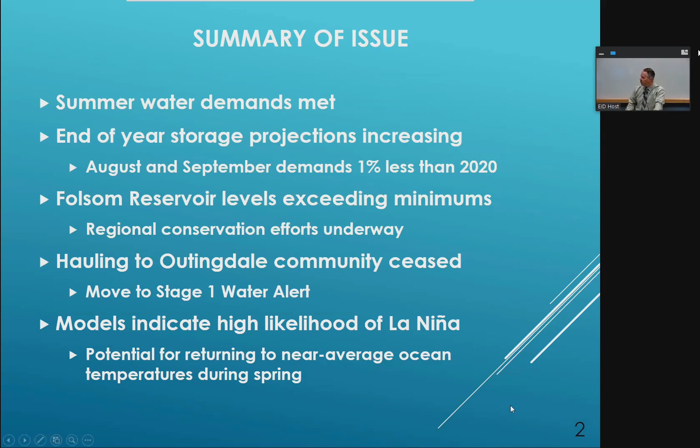Next slide, please. Okay, these were the numbers, which are obviously changing by the hour, so I'm not going to focus too much on those, but just to kind of show relative percentage of where we're at in our reservoirs here.

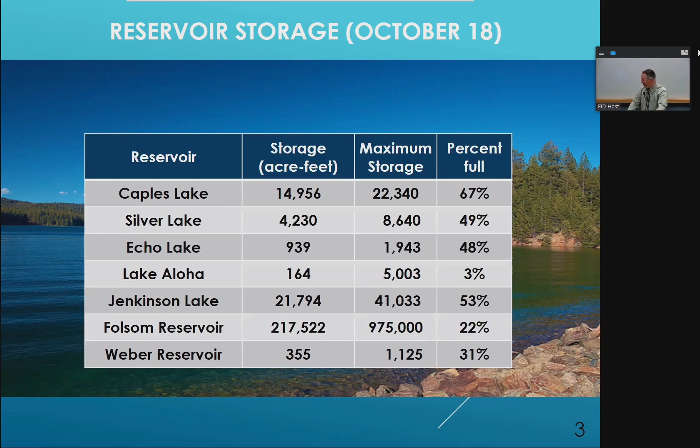That's why we put a date on it. Didn't anticipate such a change, but these were as of last Monday to make the board packet. I typically like to update those, but obviously I didn't get a chance this weekend.

We have been able to gain a little bit more storage, so now our projection, we're thinking we're going to be about 800 acre feet higher under our most conservative projection - so maybe 16.6 by end of December. Obviously, we just gained another 800 feet last night, so that number will change again. The good news is that red line, the slope should hopefully at least flatten out and hopefully start to increase. But for the most conservative planning efforts, we're still assuming the driest of conditions.

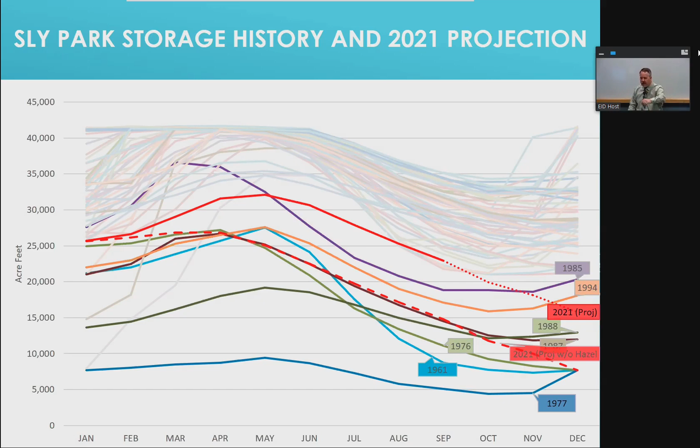Next slide, please. As I said, our demands have really stabilized, and we're down overall, which is good. Considering August and September are very high demand months, those are really good months to be down.

We shouldn't set aside what we did to support the effort to protect our community in the Caldor fire. We had 2 mobile retardant bases, hundreds of fire trucks connecting to our hydrants. When our canal was online, we gave them drafting points on a map to help protect our communities. You can't really measure that directly, because obviously we don't assign them a water meter for their efforts.

But what we do know is that even though 10% of our customers were moved out of that region, our Pollock Pines area, our demand actually was the same or a little bit higher than before they left. So it kind of shows you the amount of water that we used to support the community.

This was as of last Monday - we were trending even better, maybe 3-4%. Obviously with the rain, hopefully everybody's turned off their sprinklers for a long time, and we'll see even greater conservation by the end of the month. Next slide, please.

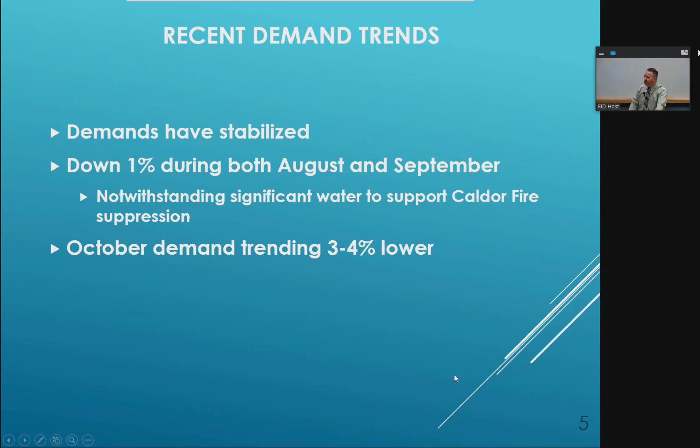I do want to just take a minute - I know several board members have raised this in the past, I think it's mostly just for the benefit of the public - but just to take perspective of our conservation. Our customers have been doing conservation for many years. I know we talk about asking 15% from last year, but we've been saving for quite a while. We went back to look at some of the records to kind of give a perspective of what that means.

So the first thing we need to look at is, El Dorado Hills, the western end of the county, is one of the fastest growing areas of the region. So our total district demand naturally is going to increase. So really, to look at consumption, you want to look on a per connection or a per capita basis, and so that's what we did.

We looked at this last dry year, 2013 versus 2020, individual homes, single-family residential connections. You see in some of our higher-using areas, those developments that had more irrigated areas, a 31% decrease in upper El Dorado Hills - that's zone 1, kind of Silva Valley Road to Bass Lake, that area where you have more outdoor water usage.

District-wide, it's everywhere from the county line all the way up to Pollock Pines, a 10% decrease even before we asked for any conservation. So it's important to look at that perspective. District-wide, our customers are using 10% less than they did 7 years ago under similar hydrologic conditions between 2013 and 2020. We looked at 2019 too, and those numbers were north of 30%, maybe 28 and 34% for some areas. That conservation has been happening for quite some time.

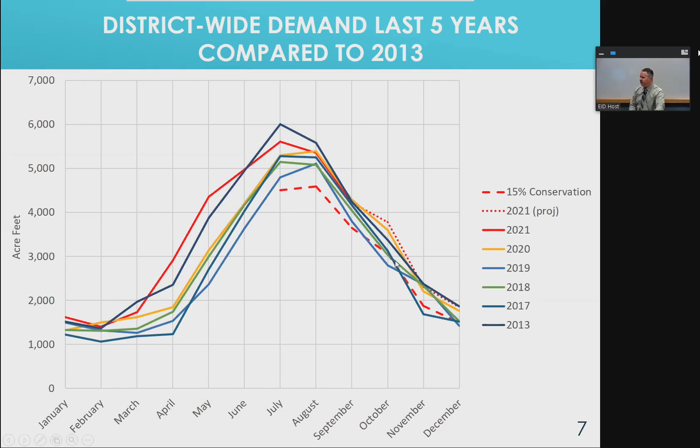This is a graphical illustration for our customers that may be listening. 2021 is that red line there, and the dark blue line was 2013. You can see we really turned that corner much sharper than we did in 2013 when we initially got into that drought situation, the previous drought situation. For our most conservative planning, we are still planning that dotted line in our projections. We're hoping that this current conservation trend will continue. Obviously, in October it will, and hopefully we get a little rain in November, December. But that is where, just for planning, where we expect to be. That dash line is just that 15% conservation from 2020. Next slide, please.

These are the weekly updates that Brian's staff send to the state. Since our drought declaration at the end of July, we are completely even as of mid-October. Obviously that number will only go down in this case, so less usage than 2020 as the year ticks on. Next, please. And about the same for recycled water, just a hair little bit better.

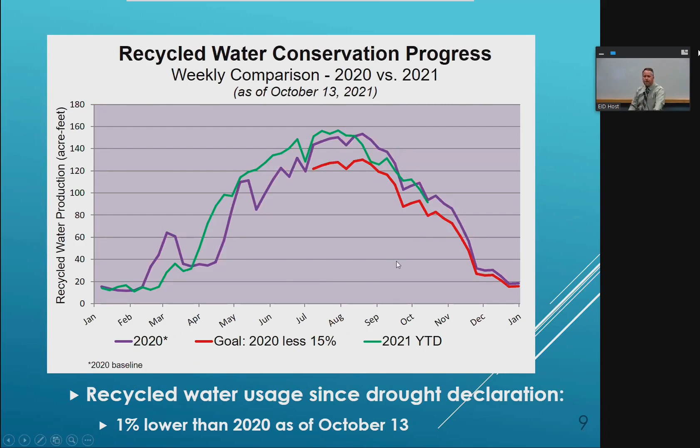I always like to show this. This is a graphic provided by Regional Water Authority, and this is kind of the greater Sacramento County region, or say the greater Sacramento region, inclusive of El Dorado County. You can see there, overall, they represent theirs in millions of gallons, but just the general trend is we're kind of following what our neighbors are doing, which is good.

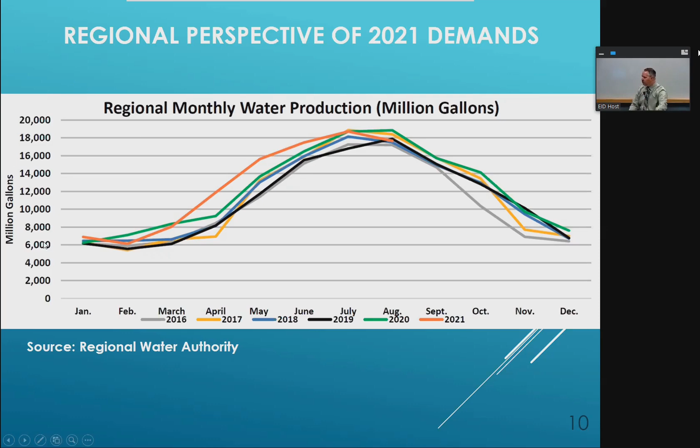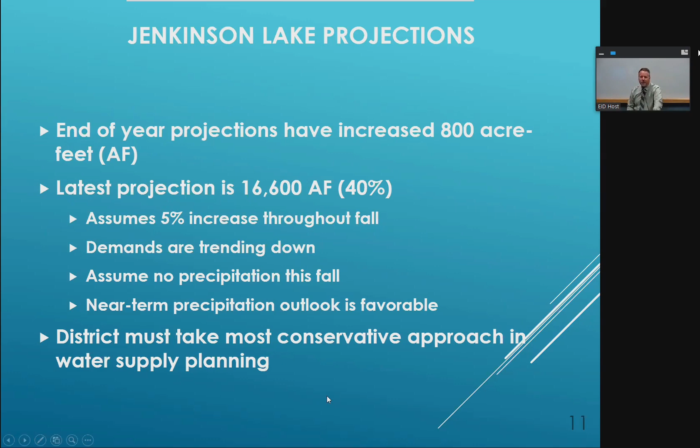Next slide. This slide will now be a little bit dated, but we did save about 800 acre feet over what we were thinking we might use in August, September. So that goes into our savings account. Our latest projection was about 16.6. As I said, that did still assume a 5% greater demand just for planning purposes. Demands are trending down, and at that point we had no precipitation. We can scratch that clearly off this list here. But we continue to take the most conservative approach.

I swear I put this slide presentation together before this weekend. So our supplies are focused on debris mitigation. Clearly, the photo I got this morning showing all the logs at the Camp Creek diversion is testament to the exact issue right now.

Dan, do we have, we approved the purchase of an excavator to station there at Camp Creek and clear the tunnel as the debris flows down. What's the status of that excavator? So I'll give you the status of the excavator and the status of work, both.

We all read the newspaper about the strike at John Deere. Fortunately, that did not affect the plant where our excavator is being manufactured in North Carolina - the other place we were all gonna take a road trip to up north. So that's still on schedule for mid-December.

Starting early last week, all through the week, we had in total, probably on most days, almost 18 to 20 people there between CAL FIRE and our staff, clearing all the trees down to the road, improving that road, knowing that this situation might happen this weekend. We could put about 50 tons of rock on that road and got it all ready to go down there. Those that have been able to take a tour down there know how steep that road is, even on a good day. So we've got that done.

We're in the process of relocating our gauge house, which will allow the excavator to be staged. Hopefully that's gonna happen later this week if the road can dry out enough. We do have a rental there now that we were doing work with, and to the extent that we can get to that, otherwise it's gonna have to be manual when it's safe, which is maybe a little while. That's where we went. Thank you.

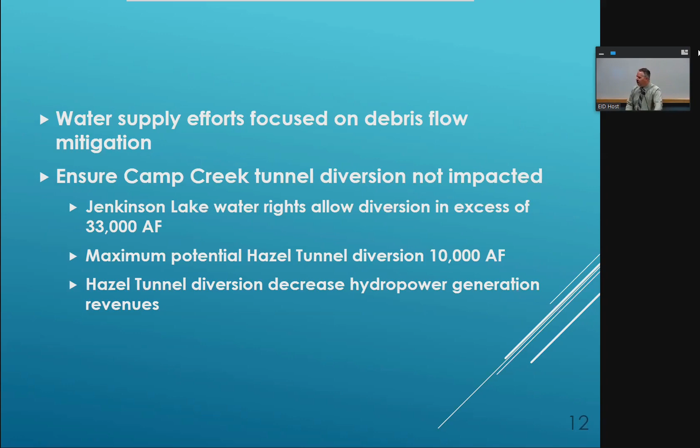So for perspective, most of that water that we'll hopefully fill the lake with will come through the Camp Creek Tunnel, and that's why we're doing everything we can to keep that tunnel clear. And then obviously there's the indirect effect that any water we take to Hazel Tunnel will mean less hydroelectric generation. So whenever we could take Camp Creek water, we do want to take that water.

Next slide, please. Okay, I'll try to move through these last couple of charts as quickly as I can here.

End of September, the absolute minimum that the Bureau had was 200,000 acre feet. They were able to beat that by around 30,000, which was trending in the right direction. And we're doing our part. As of writing this agenda item, we had used 0 Central Valley Project water this year. We've used only EID supplies at Folsom Reservoir. So that is a huge win for the district.

I wanted to look at statistics—if we're going to get back to normal, what's normal anymore—but average conditions by January 1, we need about 250,000 acre feet. It's happened: in '77 and '78, when we had that really big storm, they gained 450,000 acre feet in those 90 days. We may be close to 200,000 acre feet by the time all this water comes off the hill, so that may be a huge welcome win. Now, it's not the cleanest water in the world, and we'll have to wait for the lake to settle out a little bit, but that may be one benefit of this very challenging weekend.

Probably premature, but any idea how much snowpack we got above Caples? It's changing right now by the hour, Director Osborne. I don't have an update as of this morning. Well, get up there and find out. They're up there in snowcats right now, making adjustments. Hopefully they'll be able to safely make it back. As you know, unfortunately, if we get a big pack and we have a repeat of '97, where it all comes with a warm storm and it all comes down at once, that created all kinds of other problems. Right, yeah, we don't like to talk about that situation, but we're all completely aware, unfortunately, of that.

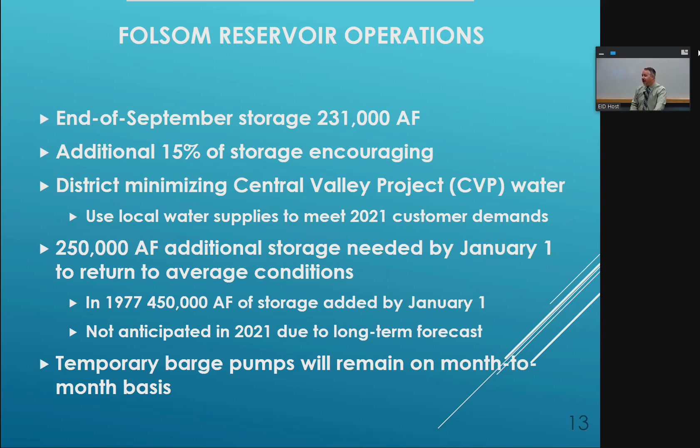And then I just want to reassure the board that we are maintaining those temporary barges at Folsom until we get comfortable that the lake is high enough. It's kind of like your rental equipment these days—you don't want to give something away when you might not be able to get it back later if you need it. Okay, next slide.

We did actually anticipate last Wednesday, Thursday being able to stop hauling. We made the decision not to do that because of what we thought might happen this weekend, and it did happen. We have the staff that manage the Reservoir A water treatment plant, which we call the workhorse, feeding everybody from Pollock Pines all the way down to Silva Valley Parkway basically. That treatment plant does not like high turbidity, and normally you don't get high turbidity, but obviously with the storm, our staff were awake all night operating the plant last night. We just couldn't afford to be diverting over to—no pun intended—moving over to Outingdale to try to get that plant started under similar conditions. Remember, about a third of that watershed was burned out.

So when we release, when we're hauling the full 6 loads, it's about $1,500 a day. It's going to be less than that right now because customers aren't using as much, but from the standpoint of doing everything we can to have safe, reliable water, we made the decision to defer starting up that plant. So all the filters have been qualified.

We've gone through the process, but just didn't hit the button to make regulatory water yet. We'll probably do that hopefully midweek this week. Nevertheless, we're on the edge of that, so we're still requesting as part of the resolution today to go ahead and move to Stage 1. We're there hydrologically, we just want to make sure we can safely be there.

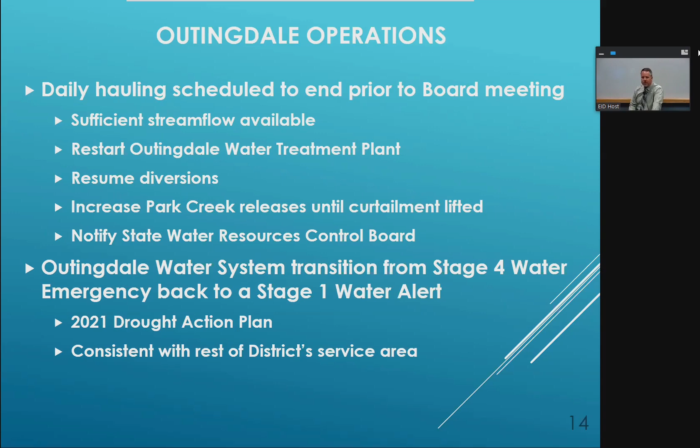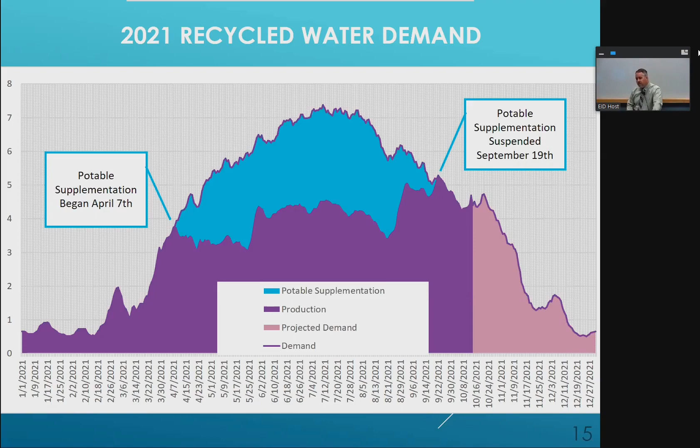Just real quick on Jenkinson Lake, obviously the lake is too low to launch boats on the main boat launch, so we did close that and pulled the mooring facility out, which we normally do. We still have some dedicated fishermen, anglers, and kayakers that still come and use the Stonebraker boat launch. One thing we were able to do is actually help PG&E with some remote area restoration. Since we're not needing our main boat launch, it typically uses a landing pad for emergencies by fire or emergency personnel, but we're able to accommodate them to use that as a staging area and helibase to do some remote area restoration. Unfortunately, it's going to take probably until January in some of the more remote areas.

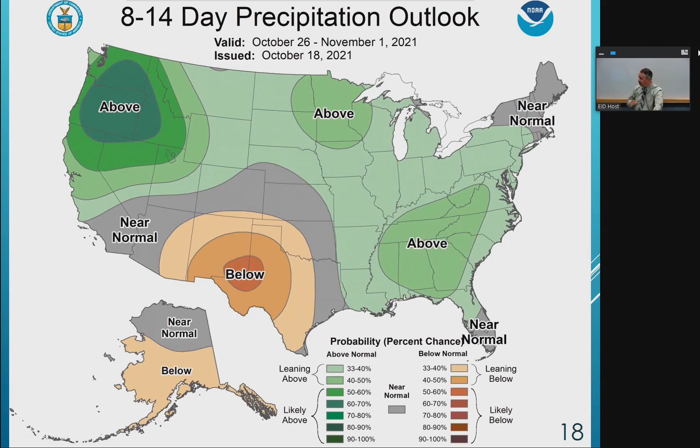Okay, I think this forecast held pretty tightly, so I think we'll just move on. They're still showing, later this week, an increased chance, but I think fortunately we've all seen that after today, hopefully we will experience a period of drying, and we definitely need it for saturation purposes.

I think this is really important, so we do get monthly updates from the CPC, the Climate Prediction Center. We've officially entered La Nina, which was predicted, right? And we're expecting overall below normal precip for the winter and get to more average or neutral type conditions in the spring. I included these two slides, or charts. The one on the bottom left is what I showed you in January, just to give perspective of kind of where we were last year. We're kind of starting out around the same point that we did last year, but we did not go above neutral conditions, which is the 0 degrees from departure of long-term average of ocean conditions. So we're kind of setting up similar to last year, that's probably the best way to describe it.

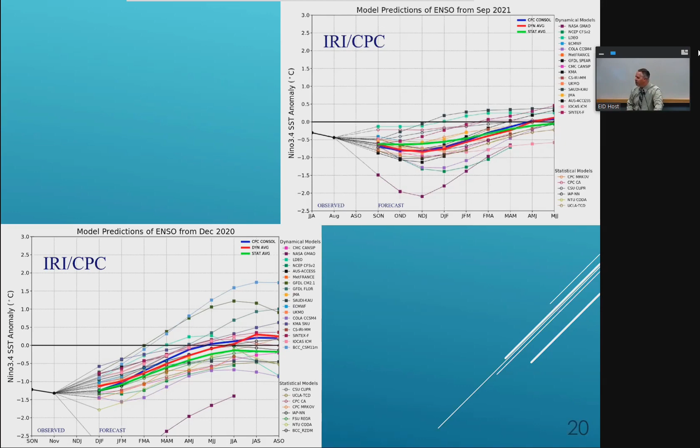Okay, I'd like to just close out the last few slides to talk about public outreach. This last one, we worked on outdoor savings. And we went ahead, every time we have rain, obviously this last one, I think everybody's aware that we need to turn off sprinklers. But even when we had those earlier small rains, just to drop little reminders, hey, don't forget to turn off your sprinklers for the next couple days. And then you probably saw, I saw on the news as well, the Be Water Smart campaign, the drought is back, just to kind of remind people. Unfortunately, the timing didn't quite work out. It's hard to say we're in a drought when we have flooded streets, but hopefully once things dry out, we'll keep moving that forward.

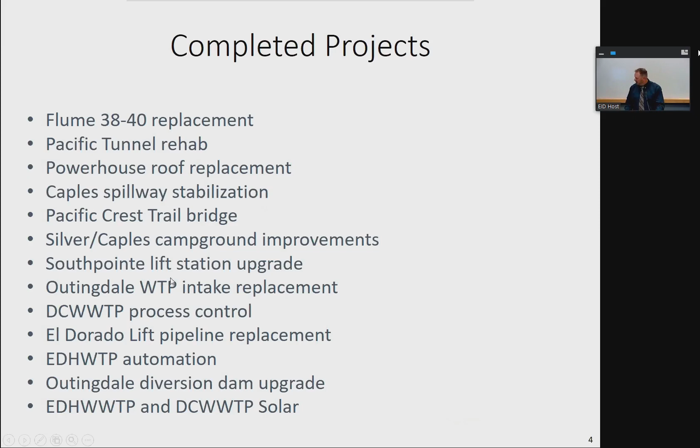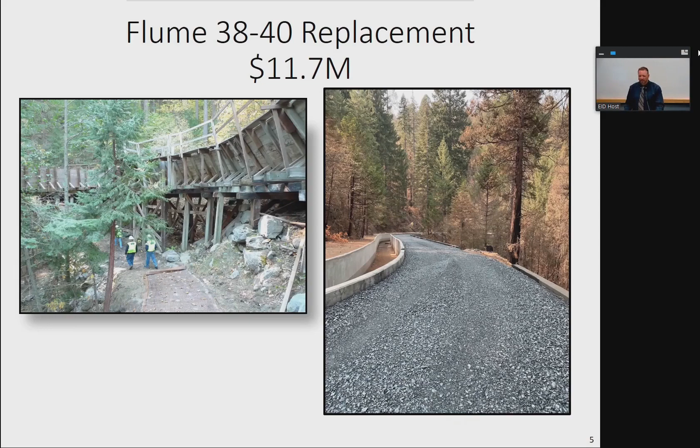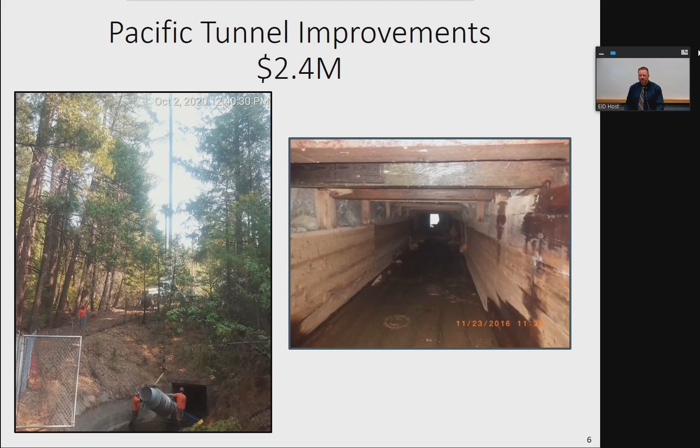We completed Pacific Tunnel improvements to remove a lot of the old wooden timber that was in the tunnel. This is a short section of tunnel along our El Dorado Canal. Next slide -- we replaced the powerhouse roof, about a $780,000 project.

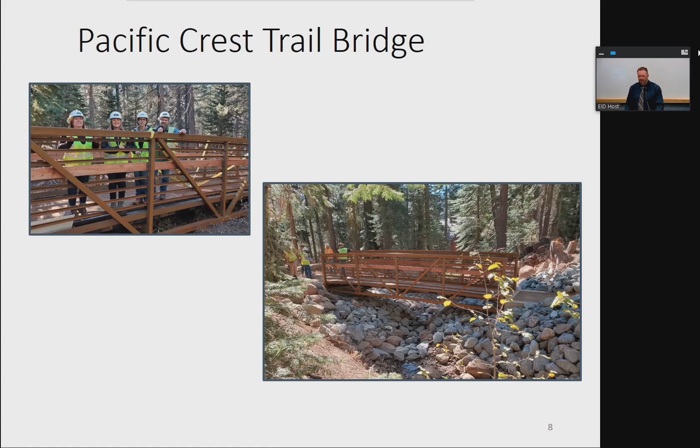A couple of FERC license implementation projects: this was the Pacific Crest Trail Bridge, completed this past year, managed by John Kessler. And then the Caples and Silver Lake East campground improvements, which were completed as well.

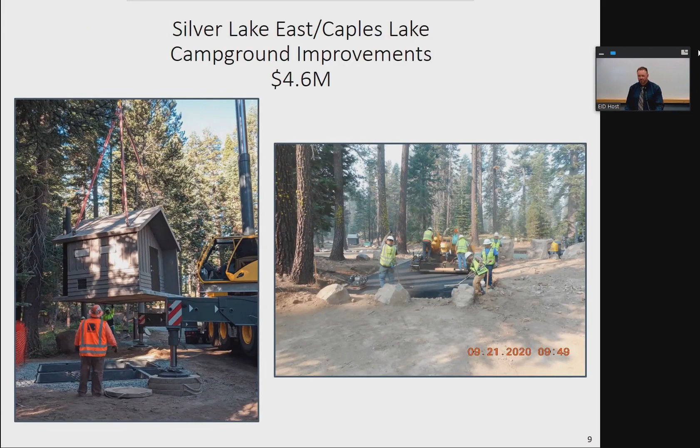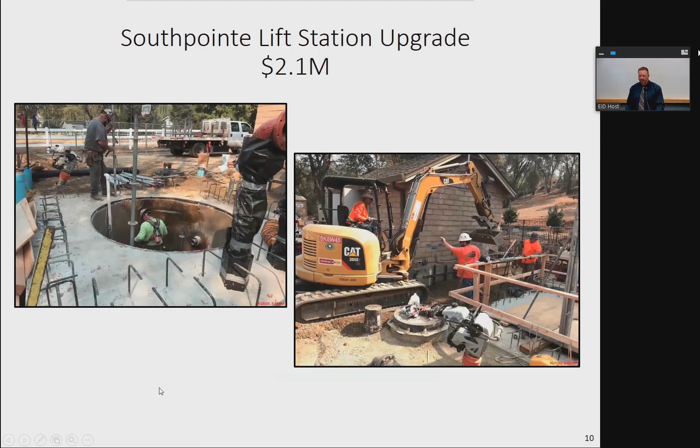On the wastewater side, we have an ongoing lift station upgrade improvement program. We completed the Southpointe lift station, which was in northern El Dorado Hills.

Then moving over on the water side to Outingdale, we essentially completed the intake replacement -- I think we're calling that substantially complete at this point. There was some minor work left to do, but this replaced both the booster pump station and the access. You can see we have a new set of stairs leading down to the river that make it much safer, and a new pump facility at the top.

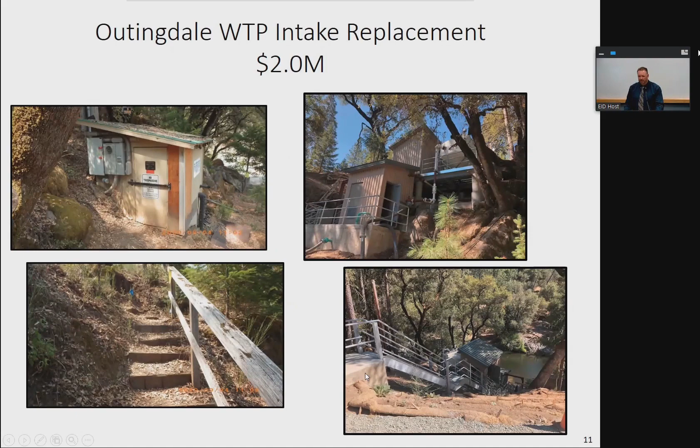We've completed solar expansion at both the El Dorado Hills and Deer Creek wastewater treatment plants, and those are online and running.

We had a large pipeline replacement leading into one of our largest lift stations in the Diamond Springs area, the El Dorado lift. You can see in the picture some pipe that wasn't completely round, and that pipe has been replaced.

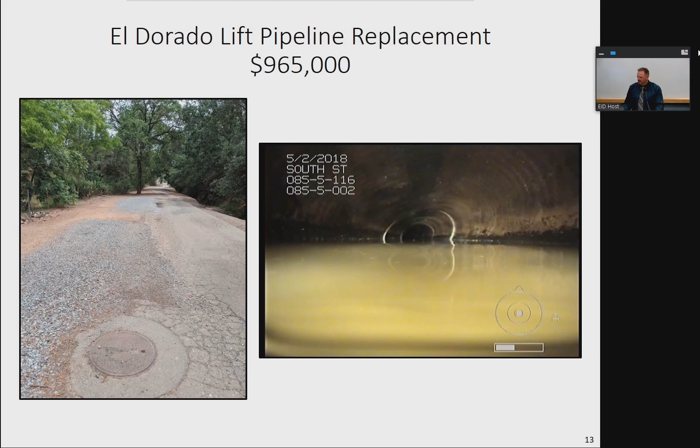Next slide -- some of the projects still under construction include the Folsom Lake intake, Upper Main Ditch pipeline, Flume 30, and Flume 4, 5, and 6. We've also got a partnering project with Caltrans on the Camino Safety Project to relocate two of our pipelines, which is ongoing.

Also, Patrick briefed the board last meeting about the Reservoir 2 roof replacement.

We are also implementing battery storage installations at some of our pump station facilities. These batteries would shave some of the peak power consumption off these facilities. We're working with Tesla on those. And then ongoing water service line replacements.

I have a question for you. Sure, going back to Tesla, how many batteries is that? And is there any future in using those Tesla batteries? What is it replacing, gas-powered generators? No, and I don't know, maybe Elizabeth knows.

We've got both water and wastewater facilities, so I don't know the exact number, but these are installations that essentially remove some of the generator power when we're running off peak.

Go ahead, Elizabeth. Good morning, Board. Elizabeth Dawson, Engineering Manager here at the district. So we have 8 sites where we're installing Tesla batteries: 4 water pump stations, the headquarters facility which hasn't started yet, Res A, Res 1, and El Dorado Lift Station. The batteries at the water pump stations have been installed; the others are yet to be installed and connected.

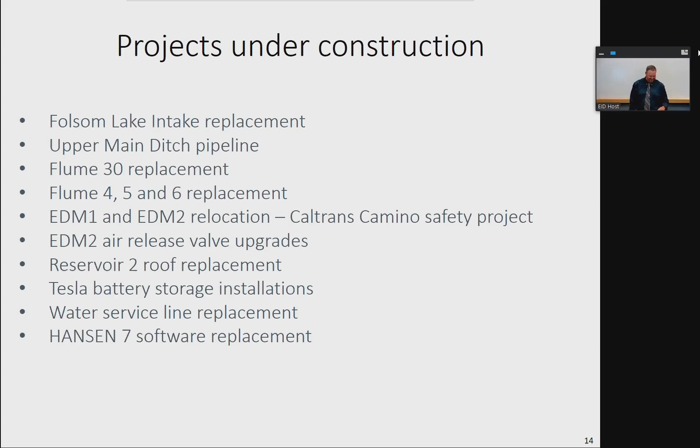Yeah, and generators. Thank you.

Yeah, so just some pictures of where we're at with some of these ongoing projects. This is the Folsom Lake intake replacement. It looks like substantial completion and operational capability should be ready early 2022 for the Folsom Lake intake.

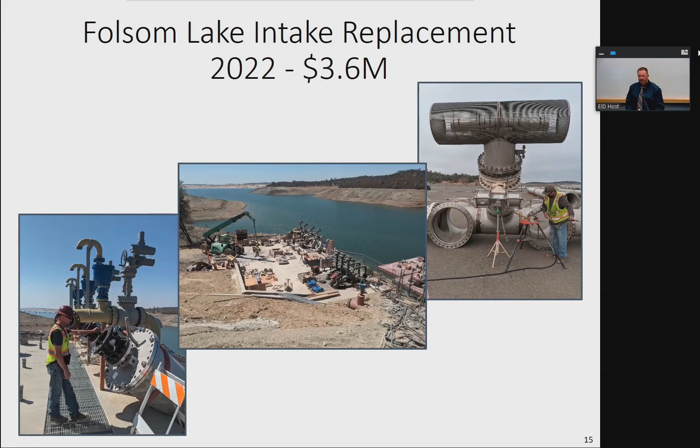The next slide would be Upper Main Ditch. That project is going really well, and it looks like substantial completion and water conveyance through our new pipeline should happen early 2022.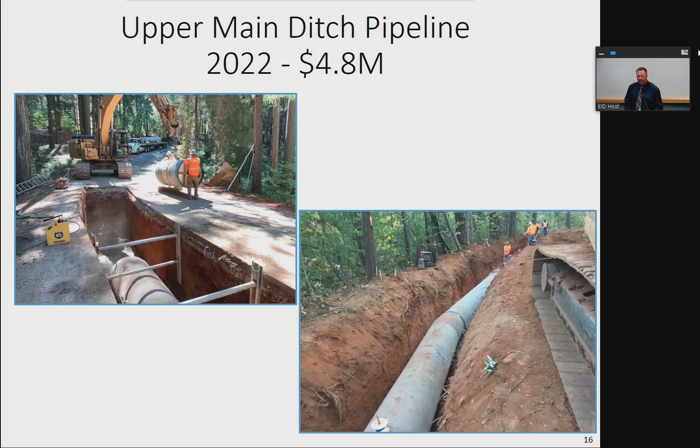I'd like to highlight, if you think about the timing, it was a difficult project to get approved, but think about it in a drought. We no longer have whether it's 1,800 acre feet or 1,500 acre feet going to seepage and loss. Now that water will be 100% delivered to the treatment plant, really saving us for a drought supply.

This slide shows some of our other ongoing projects, not so much construction, but more in the design realm or nearing construction. We've got condition assessments at our primary water treatment plants, the permit 21112 change petition ongoing, hoping to get an EIR out for that project next year, ongoing flume designs, and we are out to bid with our wastewater collection facility relocation. We'll be coming back to the board, I believe, in December with the results of that construction bid, and hope to have that under construction next year.

Also improvements to our penstock, some of our wastewater improvements like the WAS DAFT, echo conduit design, as well as our ongoing replacement or upgrade of pressure reducing stations, water line replacements, and lift station upgrades.

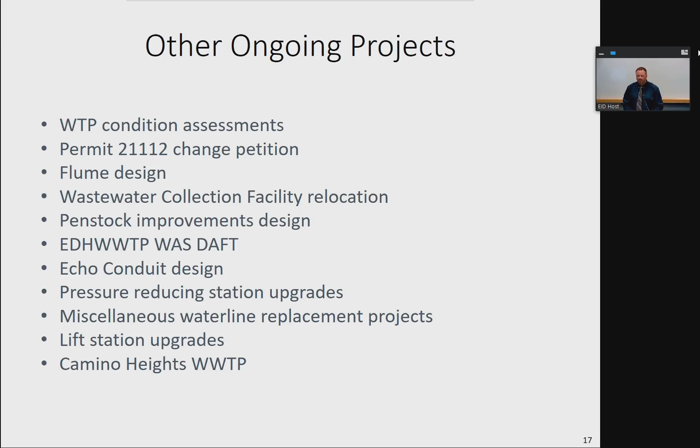Next slide. Moving to some of the projects and expenditures in the next 5-year plan that we've developed. As far as the process with developing this, our staff usually start working together to develop and prepare the individual worksheets in August of each year. We always meet with all the stakeholders to review each project and the funding estimates.

Our initial draft was a little over $300 million when we first started working on the plan. It's been reduced to about $238 million, which is where the draft CIP stands right now. A lot of that reduction isn't really us deciding not to do a project—it's more that we don't know the full scope yet, so we're not including that construction cost. I'll touch on some of those projects as we go through.

So the first cut is really the wish list that everybody puts together, saying if unbounded, what would you like to do to upgrade your facilities by each department. Then the team goes through each one and scrubs that wish list down into doable projects, and that's the $70 million difference or thereabouts.

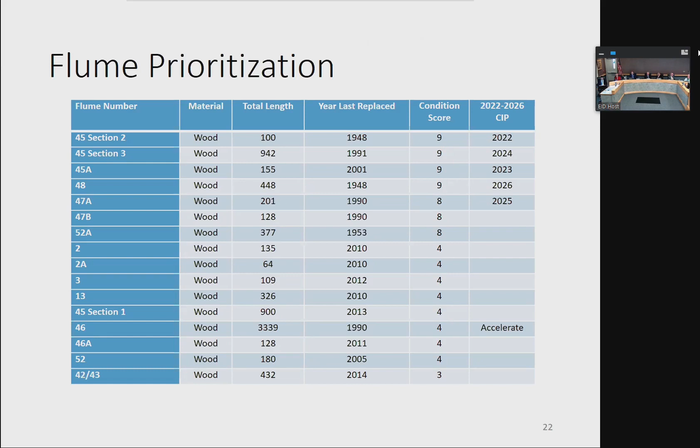So we've got in this section flume 2, 2A, and 3. And then on the downstream side, we've got flume 13, which will be our remaining wooden flumes. These, again, like Jim mentioned, they're pretty small sections that are pretty accessible, and also the condition of these are 4s, so they're pretty good condition. So given their condition and their ability to access these flumes, we're not proposing to accelerate any of these flumes other than what we're doing with flume 4, 5, and 6.

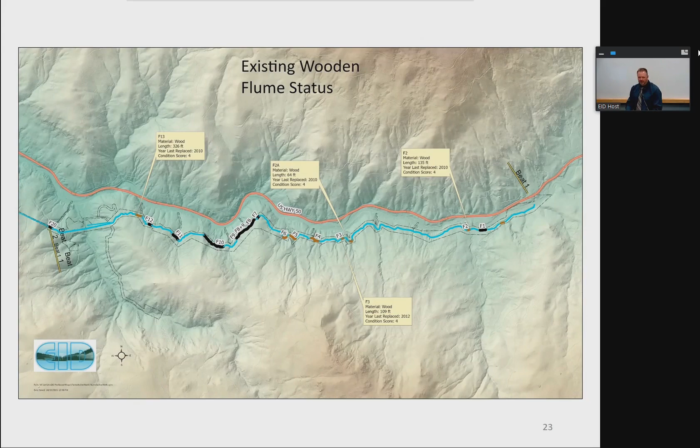Flume 42 is wood, but it's essentially brand new. It was replaced in 2014. We had a condition assessment at the time, a really alarming condition assessment that caused us to go in and replace flume 42 with wood, just because that was the material that we could replace it with as soon as possible. So the good news, though, with that one is that the access is great with that one.

We've got in our CIP to replace what we're calling the abutment section in 2022, and then there's a longer section, section 3, that's also in our CIP in the next couple years. So if everything goes well, flume 45 should be in pretty good shape as far as access and reconstruction within the next 2 to 3 years.

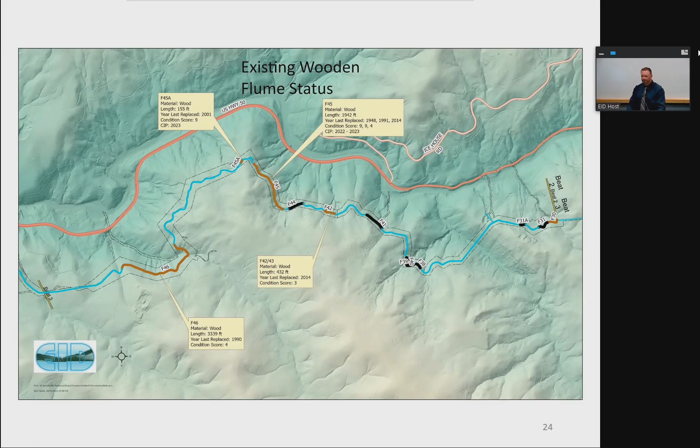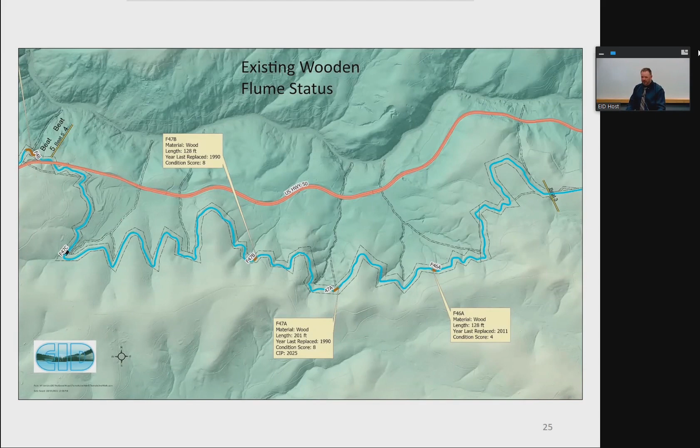The last section here starts with flume 48. This is about 400 or 500 feet of wooden flume. We're looking at an alternative to build a tunnel to bypass this, or to replace it with concrete. That's in the CIP, and I believe we have construction slated for 2026 for that flume. Moving on down the line, another short section, flume 52 and 52A.

So in summary, getting back to the table I showed, we believe with the exception of flume 46 that our prioritization and how we're spacing out these flumes as far as the replacement plan is good. Flume 46 is the variable that we'll be looking at, and that may accelerate in our plan going into next year.

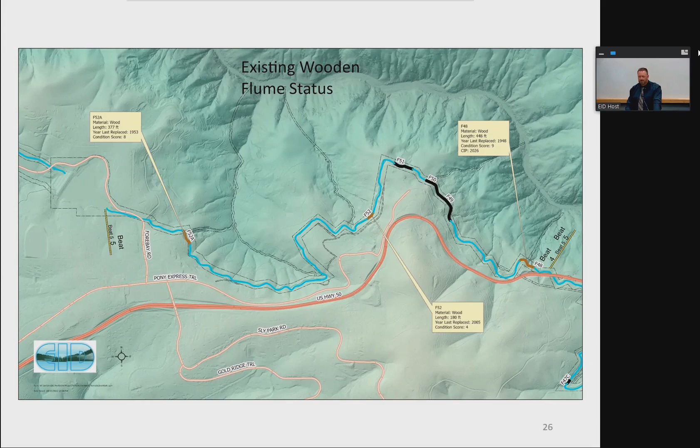Okay, the other is a hard transition from flumes to the water system capacity replacements, but the other topic that was widely discussed as we developed the plan was that we're going to need to start looking at capacity improvements in our system fairly soon.

As Dan mentioned in his presentation, it's kind of a strange thing where our annual consumption numbers have been going down with the drought, but at the same time we're seeing in our transmission system during a heat wave increasing demands that we're trying to manage through operations in our transmission and storage facilities.

So we have a master plan update scheduled in 2022 that we'll be looking at this. The two main facilities of concern right now are the Diamond Springs main and the El Dorado Hills water treatment plant.

What was happening, it looks like, in the Diamond Springs main with the flows is that during a heat wave we start losing storage along that reservoir and the recovery wasn't what we wanted, which just means we need more storage or more capacity in our system.

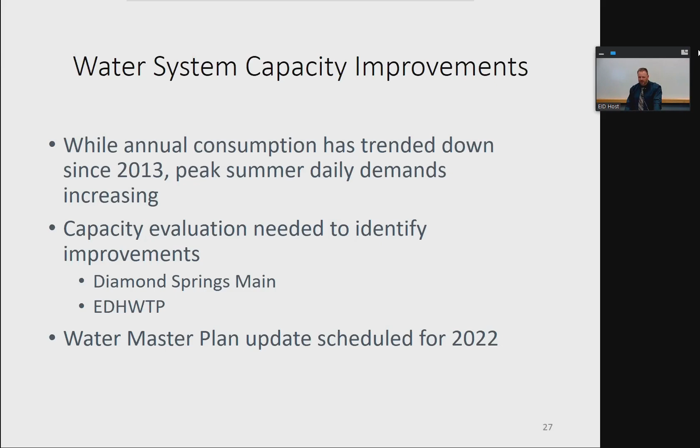And then at the El Dorado Hills water treatment plant, the peak summer demands are going up and starting to near the capacity of our water plant. So those will be looked at this next year and then plugged in as far as any improvements in the next go around with our CIP.

I showed this at one of our last meetings, just from graphics. You can see we have our Reservoir 1 and Reservoir A water treatment plants, which we have capacity there. Looking at Reservoir A, water is flowing down the Pleasant Oak main, going west, and once it hits into Diamond Springs, that's when we start seeing some capacity improvements that may be needed to get that water down into Cameron Park and El Dorado Hills.

And in the plan, there was always an expansion from where we're at, 19.5 million gallons per day for El Dorado Hills, expanding that to 26.

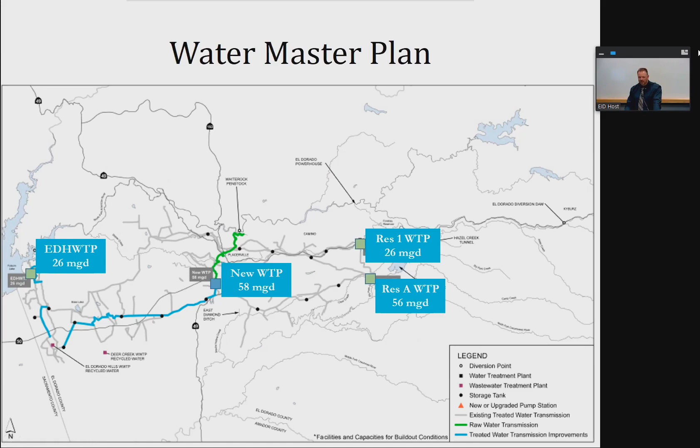Going back to flumes now, I should have put those two slides in a different spot, but too late now. We've got flume replacement for flume 45 that we've talked about, in 2022 to 2026, about 14 million. So those are two pictures of flume 45.

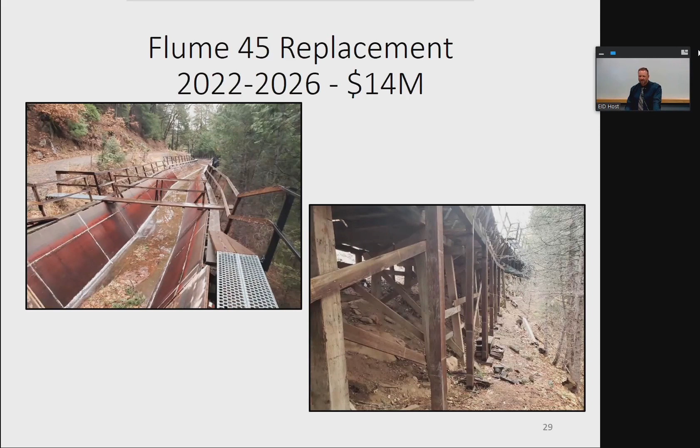This is flume 46. It's tough to see the length of this from here, but this is the upstream side of flume 46, and flume 46 winds back through the canyon and comes back around this way. It's a really long section, and we're looking at bypassing that with possibly a siphon, on the right side of the picture here somewhere.

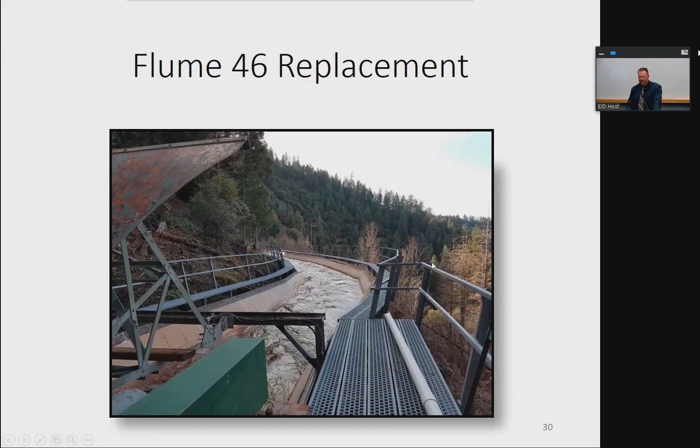Water line replacement projects, about 22 million for water line replacement. Two specific projects are Forebay Road and Drop Off Road, in the Pollock Pines area. And then we've got about $5 million annually from 2024 and beyond for future projects as well.

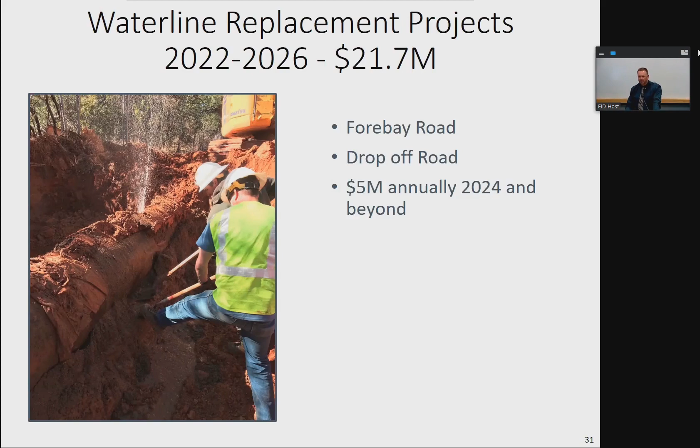Service line replacement, about $26 million, replacing all of our polyethylene services over time. We've got about $5 million plugged into the CIP on an annual basis for our crews to address these.

So those two items, the 5 million for the transmission line and the 5 million for service line replacement, are really kind of discretionary in terms of will of the board. Do we want to delay those or smooth them out to be $1 or $2 million a year? Can you buy anything really for 1 or 2 million? Or do we want to suffer, if we delay those projects, the unplanned emergency breaks in those lines that could cost more than $5 million to fix.

So that's kind of the dilemma we face, how do we keep our costs low to our customers, and yet maintain the system so that it provides dependable service. That's really kind of where the balance is. Yeah, these are all reliability projects.

These projects affect the reliability of our customers with outages or leaks. Actually, I think the one thing that I'm concerned about is that by postponing any of this, as you mentioned earlier, it's going to cost more to repair something.

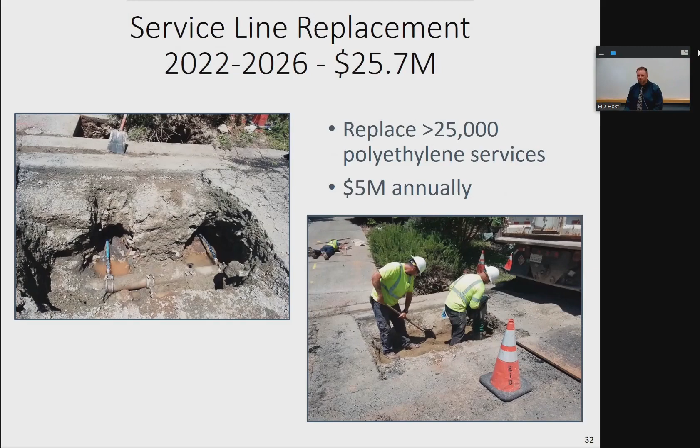Covering some of our other larger projects in the plan: Silver Lake Dam replacement. This is in the next 5 years, a design, environmental, permitting exercise. We've told FERC our schedule for this project with construction in 2027, and we'll try to maintain that schedule as best we can.

I was going to ask about that, because this is a FERC resource and they did mandate that we fix it, so that's kind of beyond the board's mandate—if we're going to maintain our FERC license, we're going to have to do this. Both FERC and DSOD are concerned about this, as are we, but we've got to go through the process with various studies and license amendments, similar to what we just went through with Forebay. Everyone knows it's an extended path to get to construction of this.

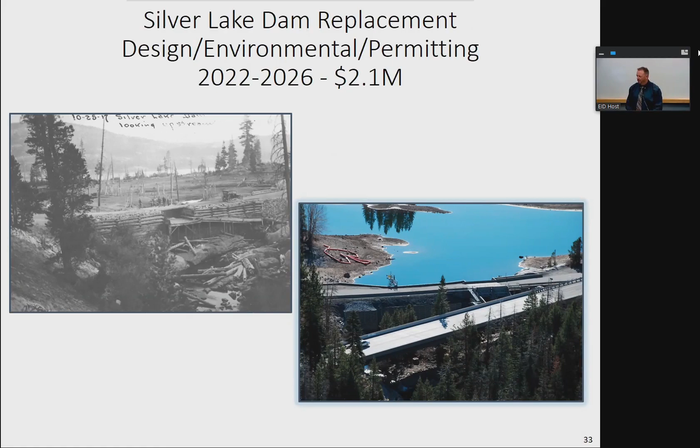On the wastewater side, the wastewater collection facility relocation is slated for 2022. As mentioned, we're out to bid with that right now, and we'll be receiving construction bids soon and coming back to the board for a recommendation to award that contract.

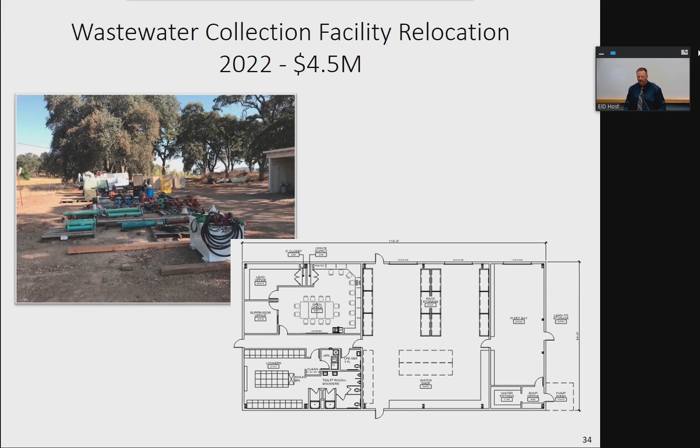Wastewater lift station upgrades—we've got about $10 million in the 5-year plan for ongoing replacement or upgrades of lift stations. Indian Creek lift station is at the top of the list, I believe, for 2022.

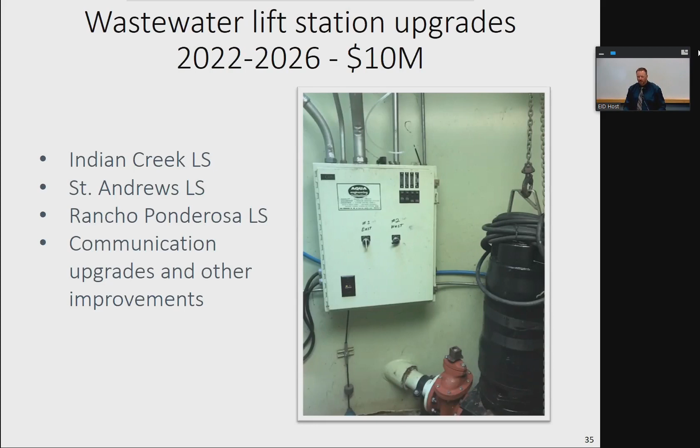We also have wastewater pipeline replacement of about $16 million, completing the town center force main on El Dorado Road. The Mother Lode force main, we really need to start paying more attention to that. We haven't had a Mother Lode force main replacement done in several years. This is AC pipe, same as town center force main, prone to failure from hydrogen sulfide gases. We've got several sections of the Mother Lode force main that we've shown the board in previous presentations, trying to phase out over the years, and we're trying to keep going with that program.

Strolling Hills sewer line needs to be upgraded in the Cameron Estates subdivision. We've also always got annual collection system pipeline rehab and lining-type projects that come to the board, and we will continue to do that annually just to maintain the reliability of our wastewater systems.

We also have a general district category of projects. This is where we have our Hansen 7 upgrade, vehicle replacement, and various replacement of our IT infrastructure.

Can we back up to the collection system for a minute? One of the items was replacement of a pipe that was under capacity. Tracy, where was that exactly? In the details, I can't find it going back to each individual sheet, but it seemed like there was an area where the existing capacity of the collection main was not sufficient to meet the demand. I think that's the case in Strolling Hills and Silva Valley.

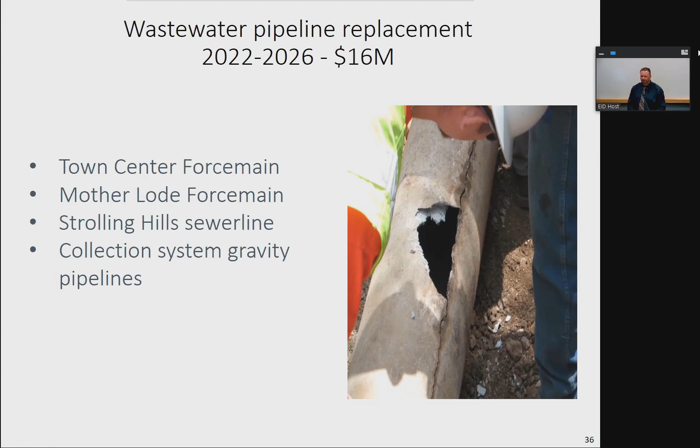Okay, if there's nothing with that, we'll move on to the financing section. So I've got a couple of slides on financing, and there'll be more to come as we go through this at the next meeting.

But this is how we're gonna pay for all this. So we've got the 2020 bond issuance that has been completed, and that paid for Folsom Lake intake, main ditch, and flume replacement. So those expenditures have pretty much all been accounted for.

And so we've talked at the last CIP go around about this time last year about a projected 2025 bond issuance. At that time, it was about a $75 million planned issuance. As we looked through this preliminary CIP, and looking at our revenues and our anticipated FCC revenues as well as debt payments, we believe we would need about a $100 million bond issuance, as Director Day mentioned.

At this point, we think most of that money would be spent on either flume replacement, the Sly Park intertie, which is also included in here, could be some other large projects in our water system as well. The Silver Lake Dam replacement that I mentioned, I think that's probably a little bit too far out to include with the 2025 bond issuance.

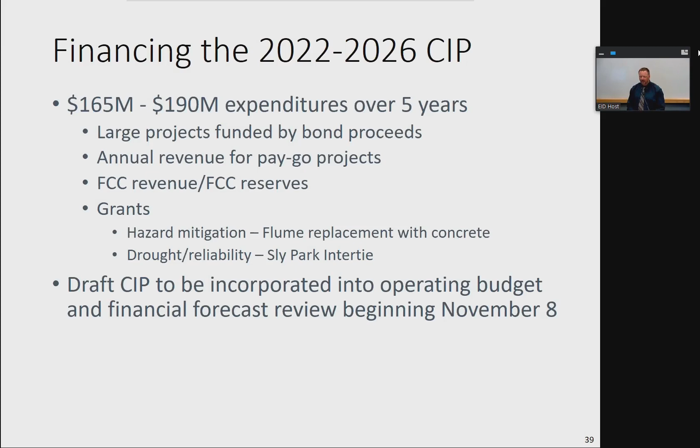So the next step, any other further revisions, we'll go back as staff and look at this and sharpen our pencils a bit more if there's anything we can identify in the next week or two. We'll be working with finance on the financial forecast with the CIP, and we'll be both coming back to the board on November 8th for both CIP adoption and the operating budget financial forecast workshop.

So the wood flumes, as you know, there's a risk of damage from wildfires, tree falls, rocks coming down the mountainside and hitting the flumes, and also mudslide damage. In addition, there are also canal breaches that cause problems. So there's quite a few things that can cause repairs on a wood flume. So we think it's necessary to maintain our inventory of the components to make repairs on these wood flumes and do reconstruction in the event of damage.

So the district maintains warehouse inventory of flume material to address scheduled and unscheduled replacement. We are looking to increase the amount of flume material from 400 feet to 800 feet. We'd like to double it, and we would keep it in this warehouse. The idea is we'd want to be able to address any type of issue without having to go through a contractor, and be able to do this with staff.

Flumes are constructed of custom milled and treated lumber. It's specialized lumber. It takes anywhere from 12 to 16 weeks to receive it once we order it. We'd like to fast track this order that I'm requesting right now for another 400 feet. The idea is we'd like to increase what we have in stock, and at the same time replace what we're using to make the repairs on Flume 4, which is going to be happening here in the next couple weeks. Any delays will result in water supply interruption and also lost hydroelectric revenue.

We do have the skills in-house, and we have the materials where we can do this in a short period of time. The other option is if we tried to replace it with concrete. And of course, we like concrete better than wood, but as far as the time frame we have to complete this project, this would extend it a month later if we were to go with a concrete canal. Instead of us being able to run water in the middle of December, we'd be looking at the middle of January. As I said, we like concrete, but not every circumstance is correct for a concrete flume.

This is just some additional damage from the Cleveland fire back in October of 1992. Just gives you an idea as far as the potential hazards to a wood flume section.

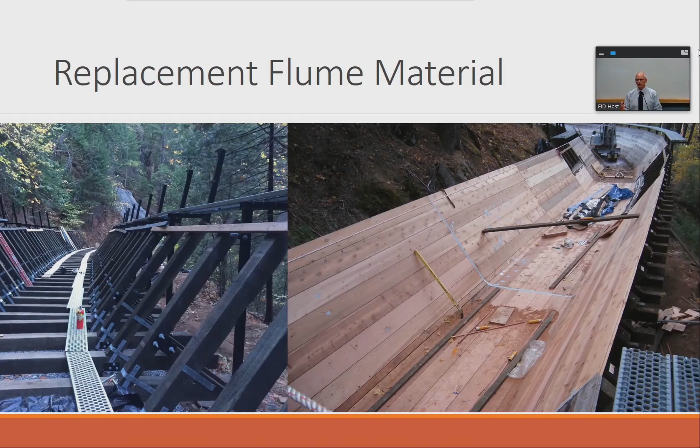So my request to the board is option 1, to authorize funding in the not to exceed amount of $150,000 for the purchase of additional flume material for Flume Material Project 184, capital improvement plan project number 21069.

Move one. That was quick. Thank you, Director Osborne. Thank you, Director Verkamp. Any board question or comments?

Just a question about managing risk, basically, trying to do what we can do the fastest. Because if it turns out that January is a horribly wet month, then if we went with the concrete in the walls, we'd be stuck. So the wood's faster, but we also have potentially very dry winter here.

Exactly. And the concrete and the walls will last, have lower long-term risk and will last much longer. So have you guys had those discussions about, it's a month, potentially dry, what's the pros and cons? And coming out of a critical dry year, we know the potential's there that it could happen again, although this most current storm, it's encouraging to see the atmospheric river.

We try to go through and make decisions based upon what's the best option at the time. With the ability to go through and get the canal running again mid-December, we have water and storage that we can use and go through and feed our water treatment plants, get hydrogeneration one month earlier, and we go through and make that evaluation every time we do a flume.

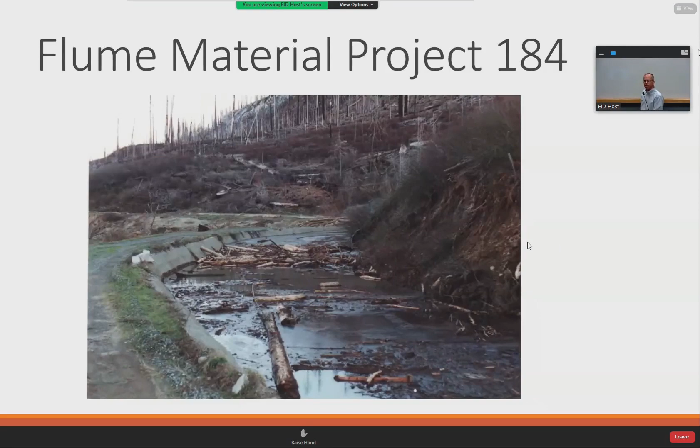So we're not leaving it and then guessing how we're going to go back in later. But there's a picture in there that shows that bench that we're building is 14 feet. While she's bringing those pictures back - that's a long lead time for milled material, three months. Where are we going to get these?

Well, I can ask about that a little bit. The material is very specialized. We have to get marine grade lumber, which is hard to get. That's your old growth type timbers. The supporting structures are the pressure treated wood.

It would be good if we could try and get away from some of that, but we can't right now. And that's the stuff that's caused our hazardous material cleanup, is that pressure-treated lumber, like we mentioned in the last board meeting. This is the picture right there.

The big lead time on that, if you look at the bottom of this, is this area - go very slowly right here. This is a concrete leveling block. There's 120 rock anchors that go into that concrete block, and then that block has to sit for another three days before we're able to start building that MSE wall.

It really did just become, you know - and if we can go back one, what was that? I have that right here. Those concrete piers right here are what we're reusing. We found out that even this one that's in this shaky kind of wall is actually doweled into some rock. And so we're not reinventing the wheel, and that's about 80 feet right there that we can do in a couple of weeks versus a month or so, plus just to get it.

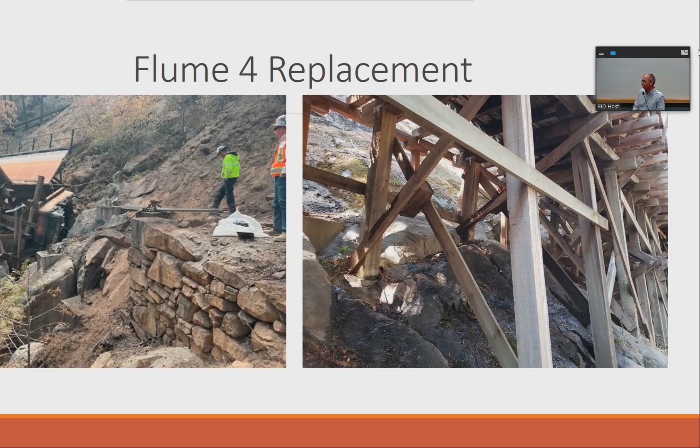Part of this is going to be a concrete canal with an MSE wall. It's the elevated section - we won't be doing all of it at this time, but it's all concrete there, so we do have access in the future if we want to change that out. We're planning ahead for that.

That was a great question, Director Day. So one reason is cost recovery - we decided to do this - and two, speed. East Bay MUD did a great presentation many years ago showing they have 3 atmospheric rivers coming through in normal years, maybe not this severe, but we don't want to miss one of them. If we can buy a month out of this and one of those big storms happens to come through, we want to capture it and not wait 30 days.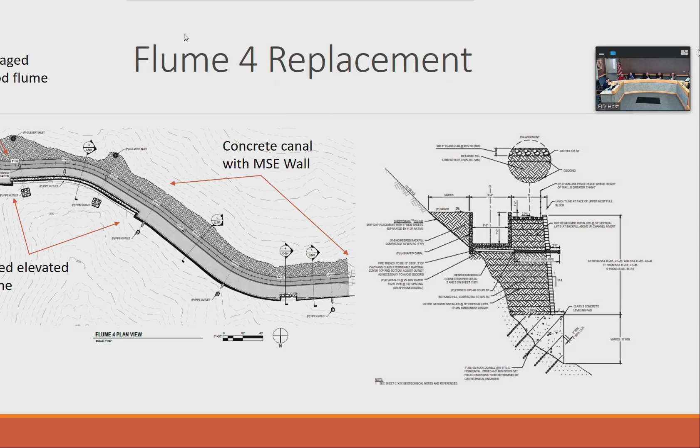In a normal year where our storage wasn't so challenged, we'd probably do the hard repair and wait the extra month or whatever. But in a critically dry year, we need to replenish our reservoirs as quickly as possible and capture all the water we can. This isn't approving the design of the repair - it's just saying let's get some materials on hand so we're ready for the next one, which will probably come. As part of the strategy, if we have, God forbid, another fire through here, most of the flume sections are short, so we won't have to wait long if we decide to go back with wood. That's the strategy as well.

Just for your information, it's snowing at Whitehall.